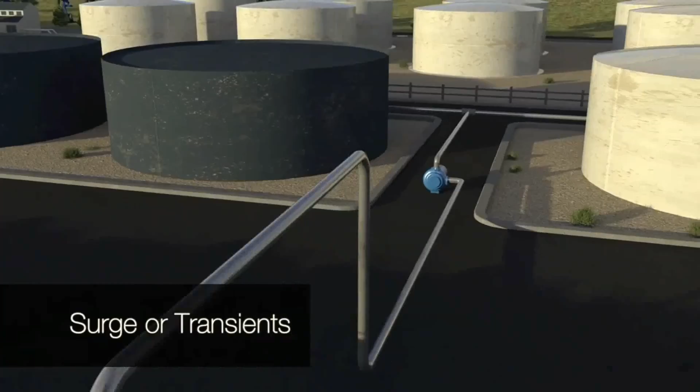In an oil and gas facility, fluid systems are subjected to many changes in flow and pressure. Such changes initiate varying degrees of pressure waves, also known as surge or transients. In particular, these pressure transients can happen during the loading and offloading of fuels between tank farms and loading ships.

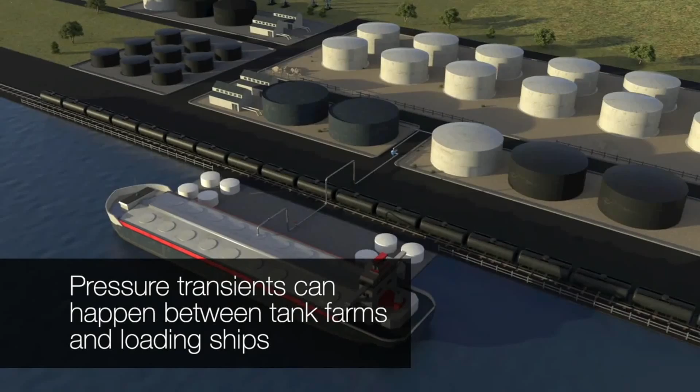Fuel dock delivery systems are especially exposed to unforeseen events that cause overpressurization, pipe ruptures, and numerous other system failures. It is quite common for surge events to begin with a low-pressure transient due to malfunctioning equipment, pump failure, or loss of power during the fuel transfer operation.

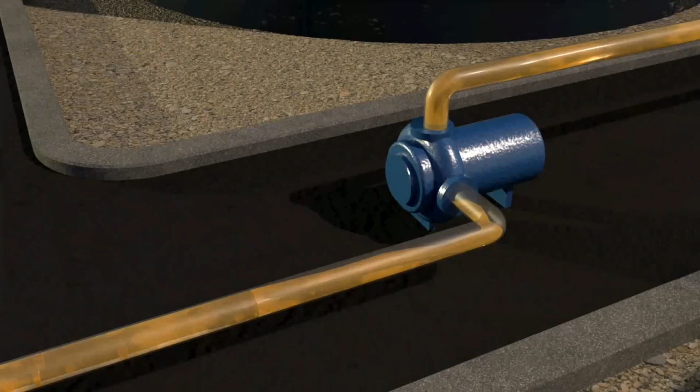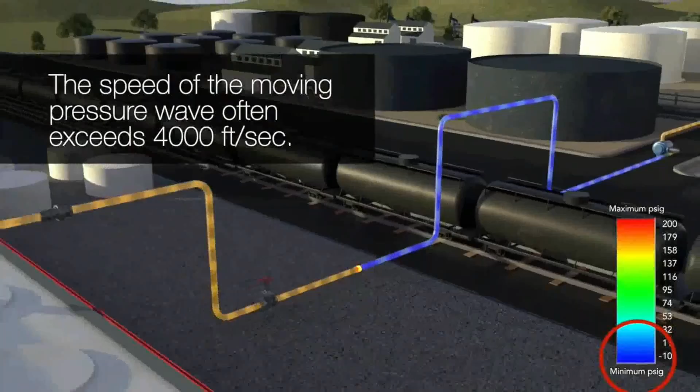In a low-pressure surge event, vapor pockets can quickly form as the pressure wave is emitted out. The speed of the moving pressure wave is a function of elasticity of the fluid and pipe, often exceeding 4,000 feet per second. When a low-pressure transient wave reaches the end of the system, it is reflected backwards with enough energy to collapse any vapor pockets that have formed.

Sudden collapsed vapor cavities release a burst of energy in the system and cause new extreme high-pressure transient waves. With nowhere to go, the energy wave is emitted throughout the system, hammering all junctions along its path. The sudden pressure spike is enough to cause catastrophic failure at the pump or weak points within the piping system, such as elbows and various instrumentation.

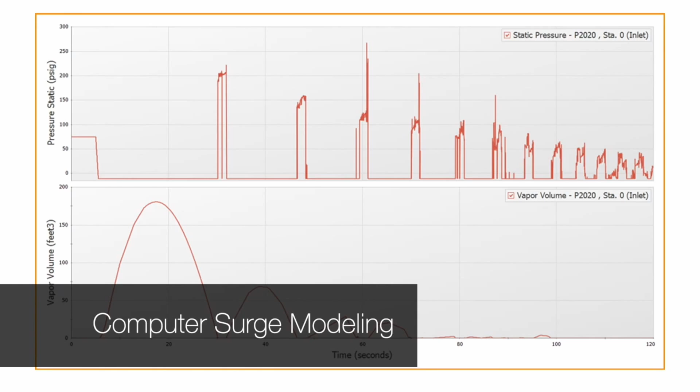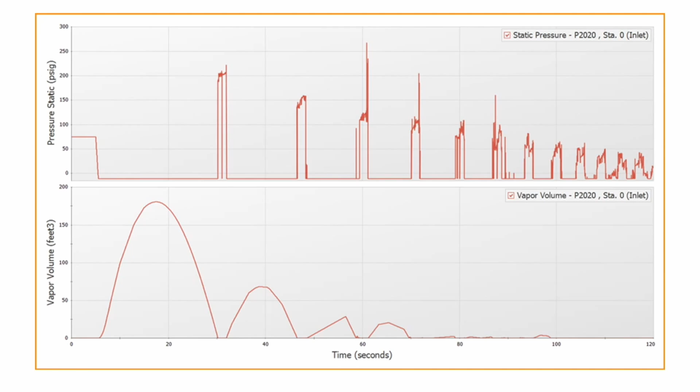Using computer surge modeling, such as Applied Flow Technology Impulse software, transient pressures and vapor volumes are predicted. Surge models show a growing vapor cavity as the pressure drops below the fluid's vapor pressure and into full vacuum. When the transient wave returns to the vapor pocket, the pocket collapses, leading to immediate pressure spikes and secondary surge events.

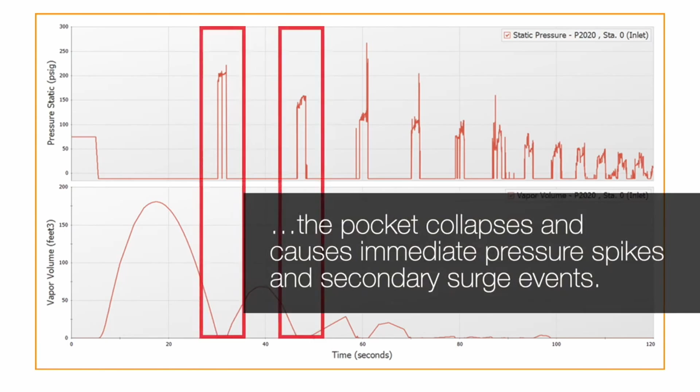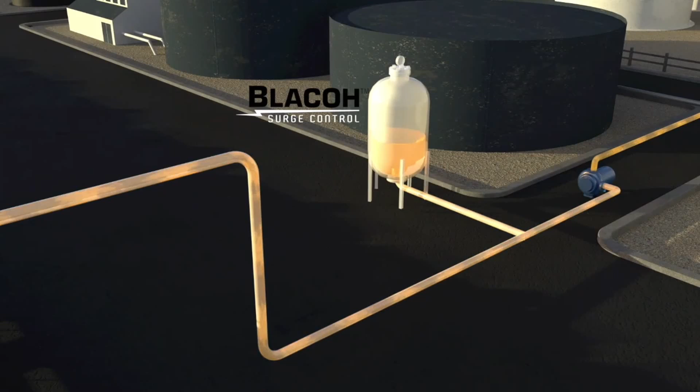Blacoh surge vessels and surge wave monitoring systems are effective and innovative solutions when mitigating risk and protecting fluid transfer systems. When Blacoh surge vessels are installed near the pump discharge and there is a pump trip, fluid is released from the vessel. The added fluid prevents the system from dropping below vapor pressure.

The fluid energy caused by the returning high-pressure transient is absorbed by the vessel. The internal bladder oscillates, dampening and stabilizing the fluid pressure, protecting the system from potentially catastrophic negative vacuum conditions. Because transient pressure waves are moving near the speed of sound, monitoring surge pressures requires a high-frequency pressure detection device, also known as transient monitoring.

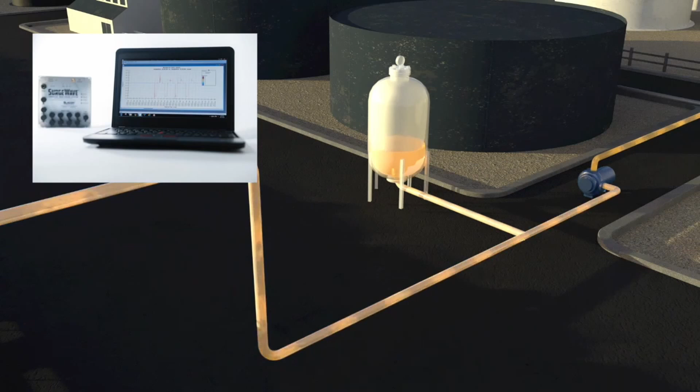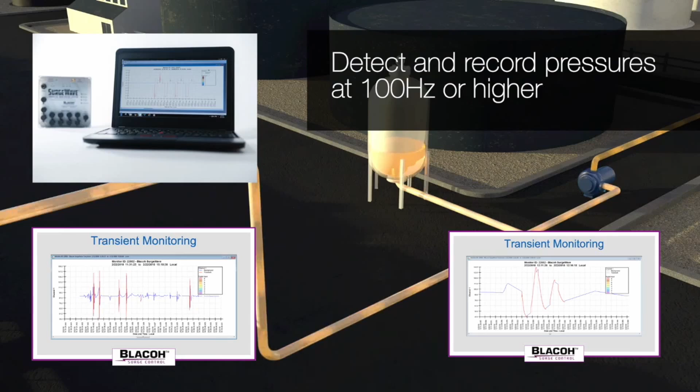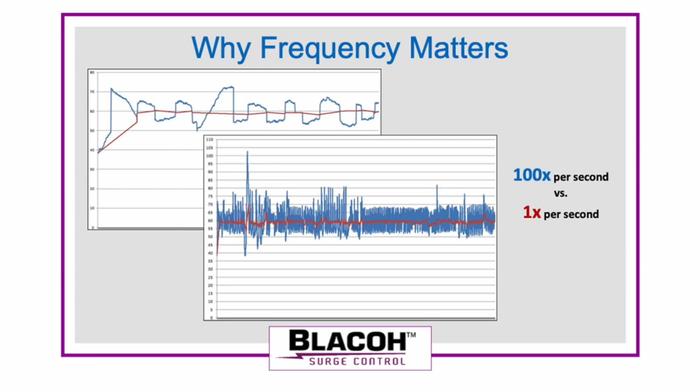Blacoh's surge wave transient monitoring systems can detect and record pressures at 100 Hz or higher, allowing critical systems such as loading terminals to have early detection and prevention of pressure problems. Transient pressure monitors enable plant operators to be aware of the true system pressures and fluctuations normal pressure detection equipment cannot provide. Blacoh surge wave equipment also enables engineers and end users a method for validating the computer surge model.

Early pressure transient monitoring, along with Blacoh surge vessels, provide fluid system operators with optimum solutions in preventing catastrophic failures and protecting critical systems.

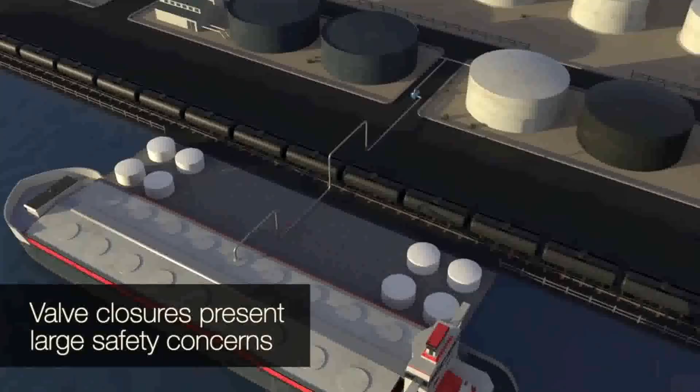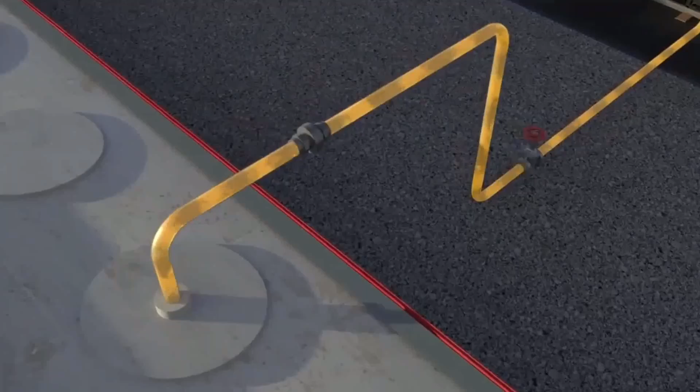Valve closures present large safety concerns as they emit immediate high-pressure transients, especially when a valve is closed abruptly. System design engineers must think about all valves in the system, including valves on the ship which are outside the control of the plant operators. Should a ship break away from the dock, engineers must decide how quickly the valve should close.

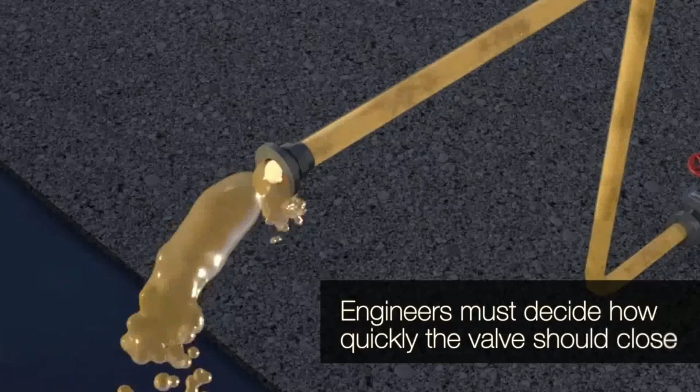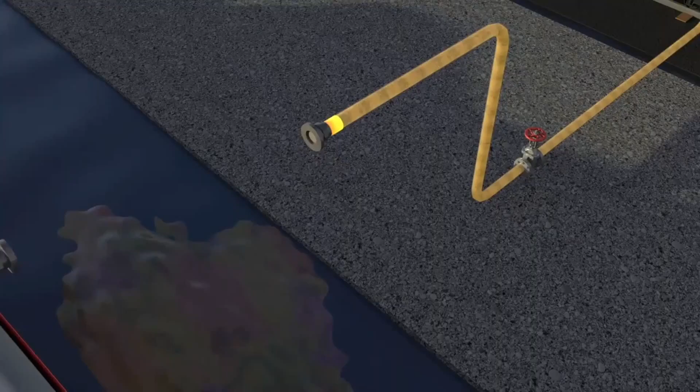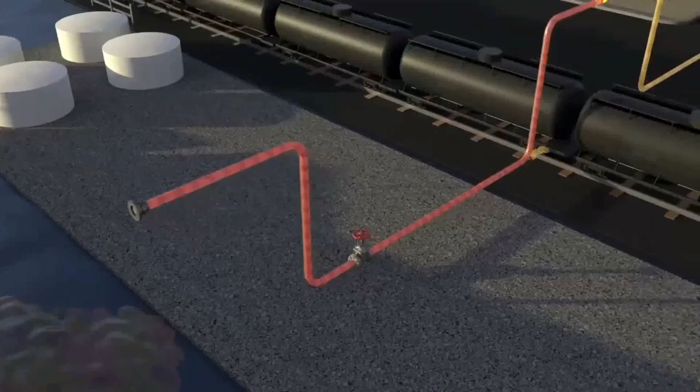A 30-second slow closing valve may decrease the initial surge in pressure, however thousands of gallons of fuel would be discharged to the environment. A quick 2-second valve closure greatly minimizes the spill. However, the immediate upsurge in pressure can easily exceed design pressures. The high-pressure transient wave initiated at the valve inlet travels backwards towards the pump at a speed near sonic velocity.

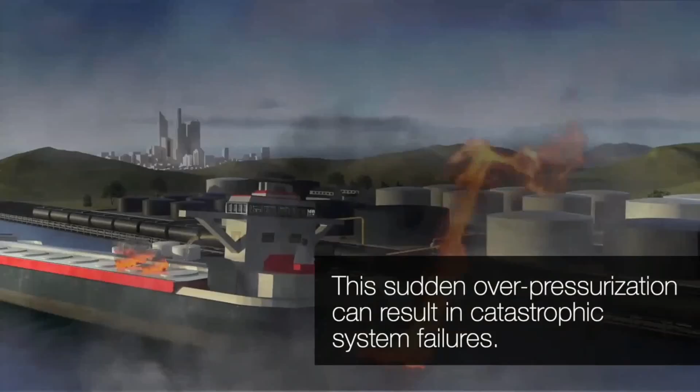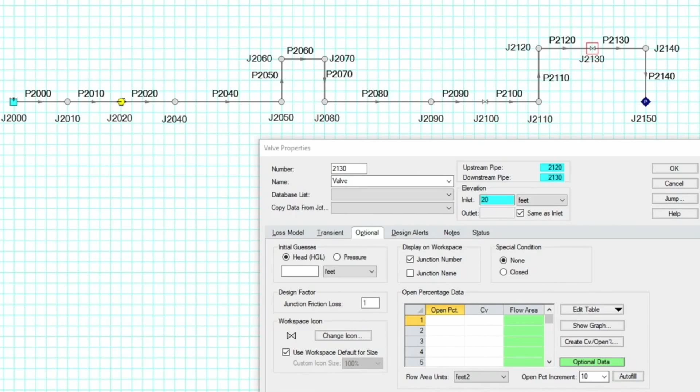This sudden overpressurization can result in catastrophic system failures within the piping, fuel systems, and equipment. Such failures are often the initial cause of much larger and more costly safety events. System designers are careful to incorporate within the surge model the geometry and closing characteristics of the valves. This is necessary in order to discern in advance the true potential transient pressures.

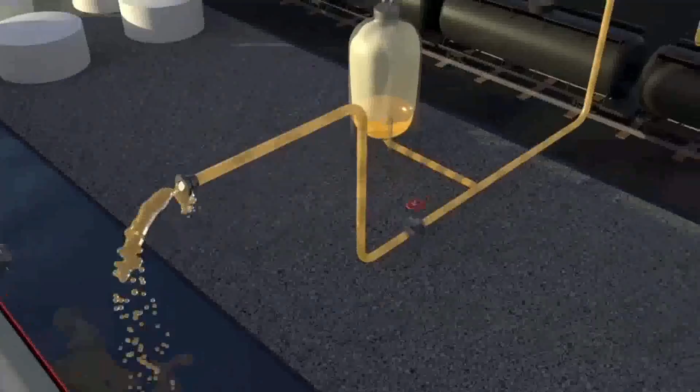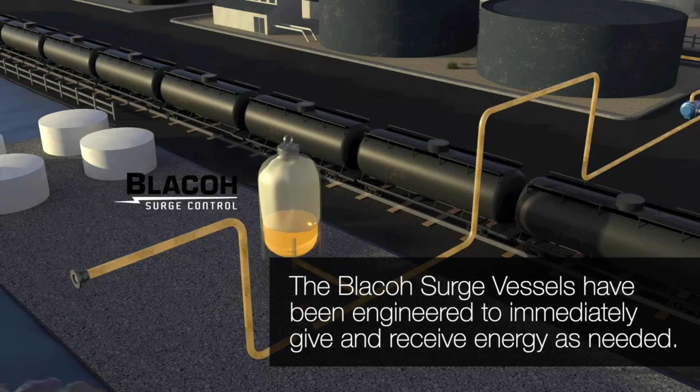Solutions for mitigating high-pressure transients might encompass specific valve operations, relief valve skids, and/or surge vessels. The Blacoh surge vessels have been engineered to immediately give and receive energy as needed. Blacoh surge vessels are always on, dynamically reacting to surge events throughout the fluid system, protecting equipment and providing superior containment with no loss of fluids.

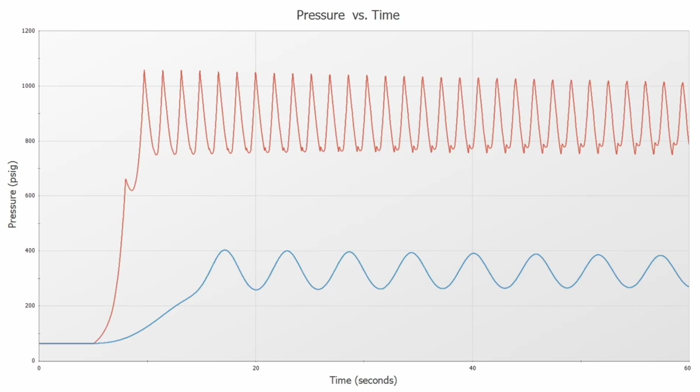Surge modeling enables engineers to consider numerous operating scenarios and properly analyze risk that would otherwise be hidden. Blacoh surge vessels, surge modeling experience, and surge wave transient monitoring systems mitigate risk, prevent fluid system failures, and protect equipment. Owners and operators gain confidence in the system design where safety and environmental management are critical to the success of the plant.